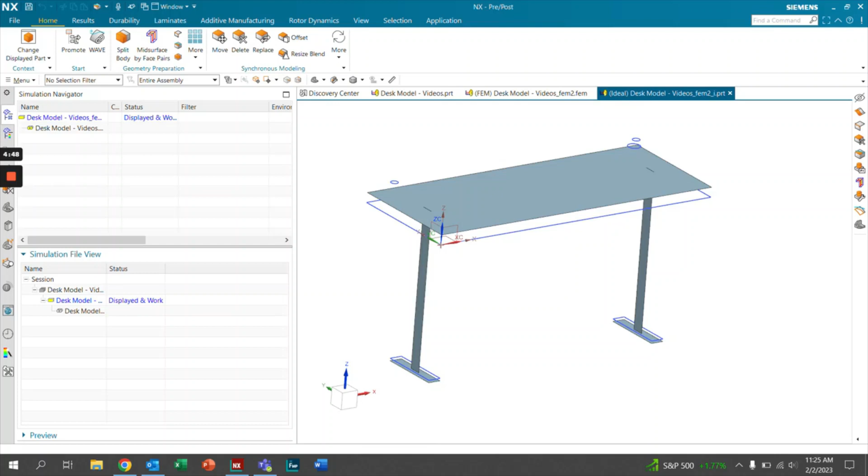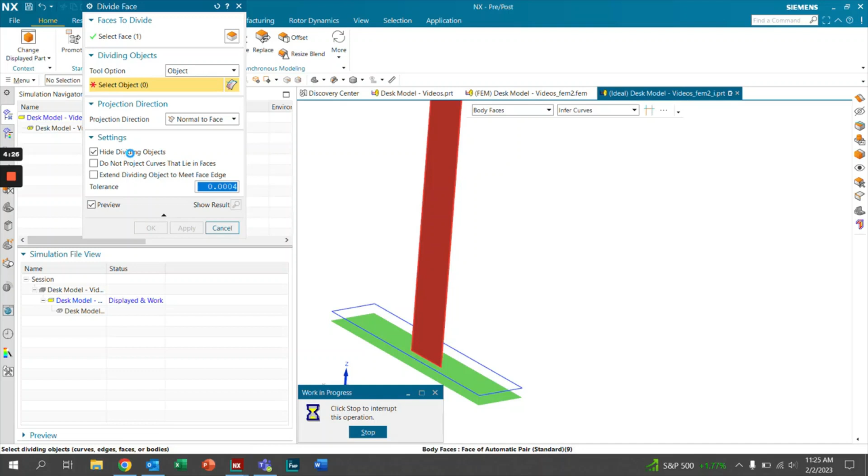The first step into lining up our nodes is to see where our faces and sheets are intersecting. We're going to use this divide face tool to create a line that will help us line up our nodes. So we want to select the face to divide, which is this face, and the face that it's going to divide, which is this face. We don't want to hide the dividing objects, and we want to click this box that says Extend Dividing Object to Meet Face Edge. So we click that and go to Preview, and you see that it creates a line right here, and that's exactly what we're looking for.

So we're going to apply that, and do that everywhere they intersect. We have another intersection right here. This is the face to divide, this is the face doing the dividing. We're going to go ahead and click Apply.

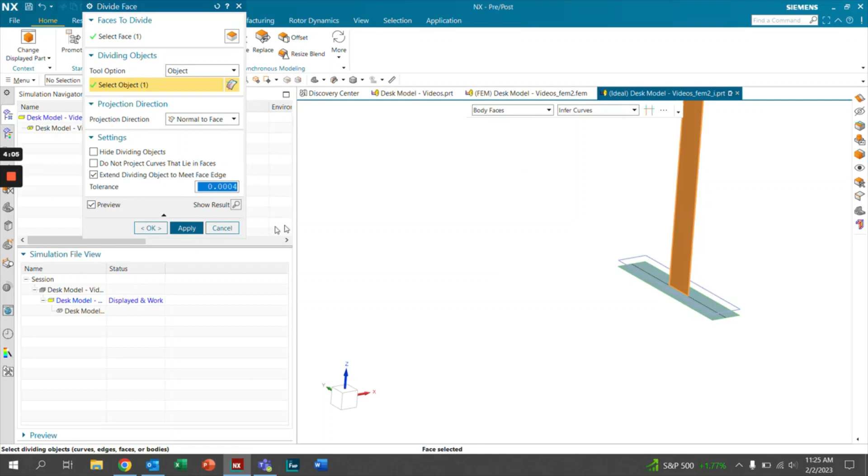Again, we have two more intersections. We're going to flip this down. The face to divide is this big face, and the face that is dividing is this face. We're going to go ahead and click Apply.

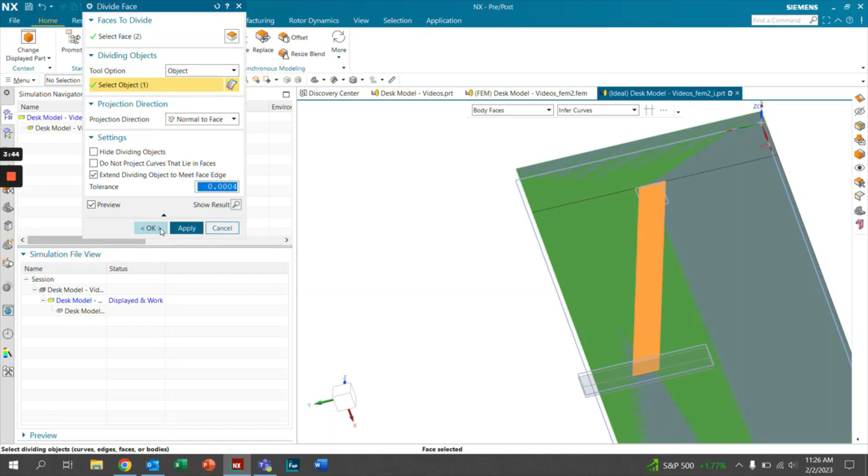We're going to zoom out and do the same for this face. I'm going to click OK. So now we see that all of our faces have been divided.

So now we can actually go into the meshing. We're going to be done with the idealized part, and head back over to our FEM model. We're going to open up the FEM model, and we'll see that we still have some solid bodies showing, so we're going to hide those. We just want to work with strictly the sheets.

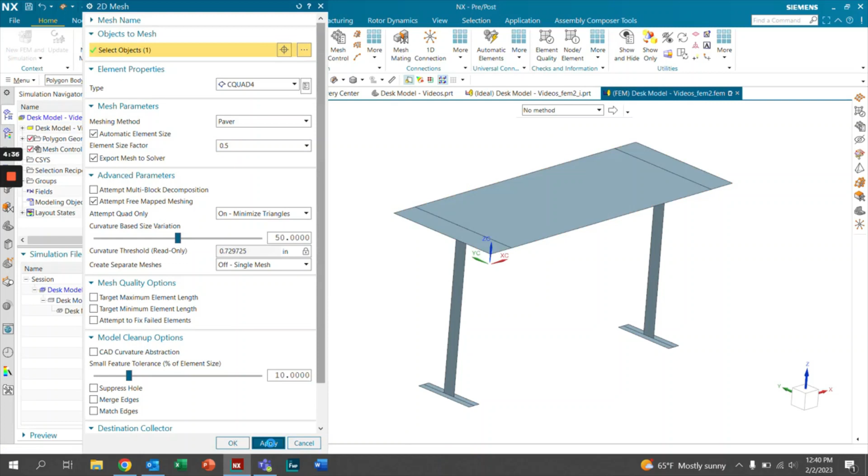From here we can finally apply our mesh to capture our geometry. We're going to click on the 2D mesh, click on automatic element size, and have it at 0.5. We're going to mesh this sheet right here, apply, and go one by one and click all of these sheets and mesh them. Let it load.

Sometimes meshing can take a little while, so we're just going to let it load, and go one by one.

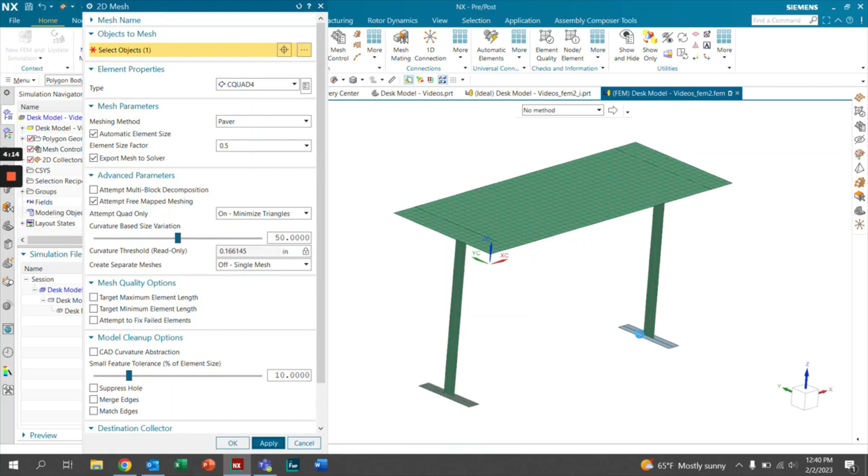Once this is done, we're going to go ahead and add our materials. It's very important that we add our materials, because if we don't, we're going to get errors. So we're going to go to our 2D collector, open up, go to each and every one of them, right click, hit edit, and add materials. For this material, we'll just go ahead and add a basic aluminum 6061.

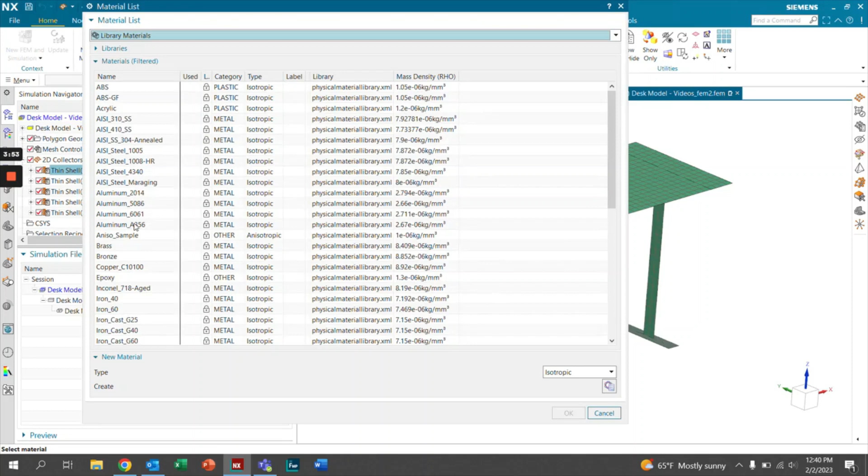Before I go, we're also going to want to add thickness, and the thickness is going to be the same thickness that you modeled it as in the 3D part. So we're going to have this one be 4 inches. We're going to click OK.

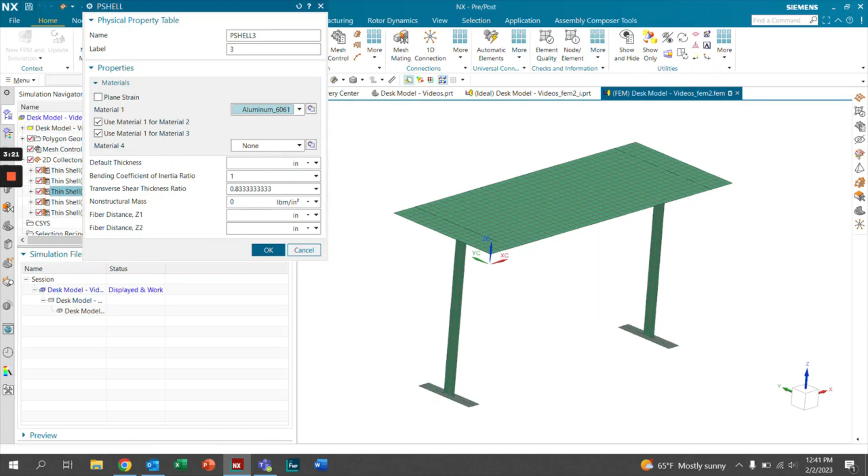You're just going to want to go ahead and do that for all of them. So this one, same process, aluminum 6061. The default thickness is 1 inch for these. Click OK. Edit, same process, aluminum 6061, thickness 1 inch, OK.

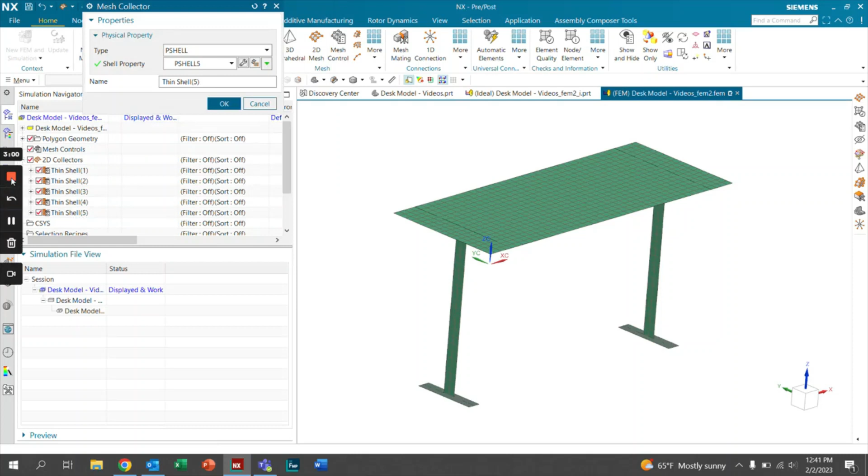So now that our mesh and materials have been applied, we want to make sure our nodes are lined up. We're going to zoom in, turn this to the other side, and see that we have one node right here, one node right here, and one node right here. We're going to go to more, click on duplicate nodes, select both of these bodies, and we're going to see that they are.

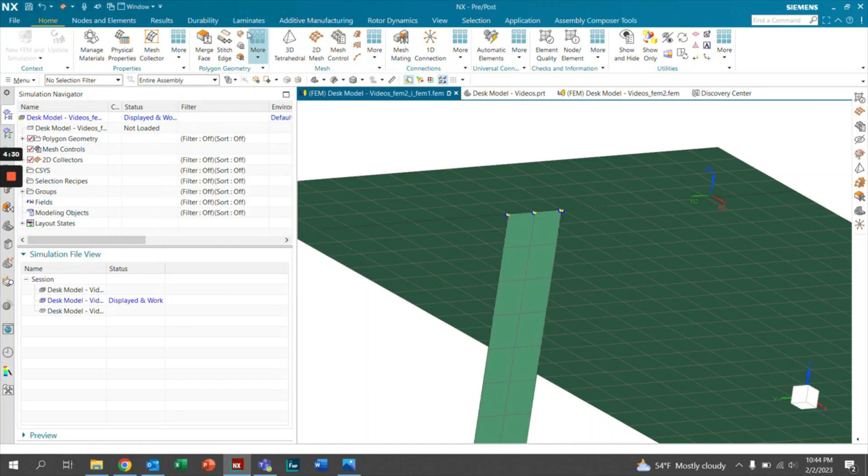However, since we will be applying a mesh control to the bottom surface, we're going to have to apply one right here. So the first thing we want to do is split the face, and when you do this, you want to create a line as straight as possible. We're going to grab this point right here, grab this node right here, and click OK.

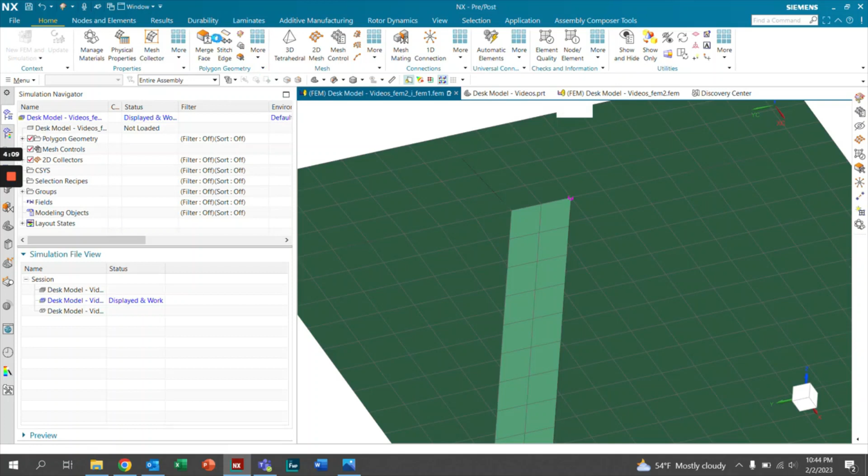As you can see, it creates this straight line right here. Then we're going to update the mesh, and now these faces are split right there. We're going to do this on the other side as well. Always want to grab this far edge first. Split right here, split right here. Click apply, update. Now we see that the mesh changes right here.

We're going to apply a mesh with just 2 elements. Click automatic, click OK. Then we're going to hide this. I want to go ahead and hide this, and apply the mesh to the same edge, but on the other surface. Automatic, click OK, and should be good to go.

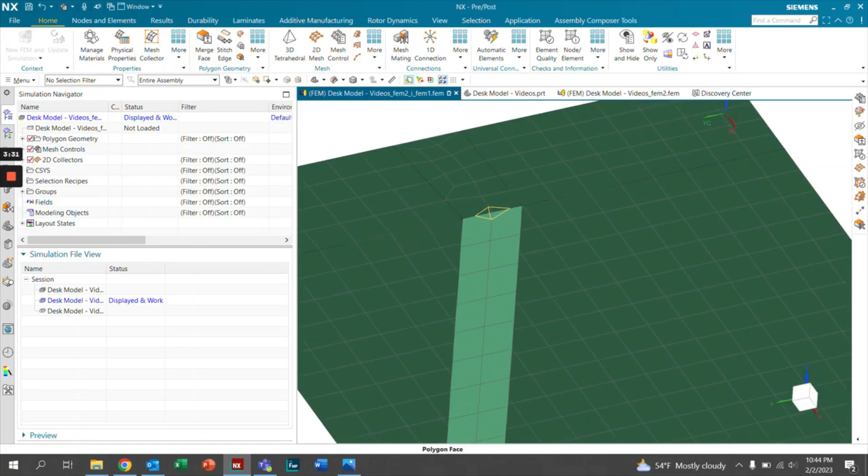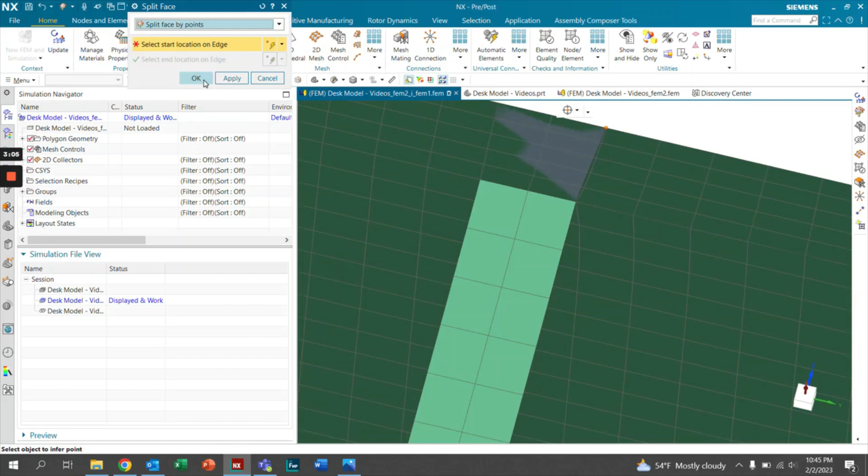Now I'm going to zoom out and do the same thing on this other side. Zoom in, we're going to split the faces. Grab it from this edge right here to this node right here. Click OK, update. Then the same thing one more time: this edge right here, this node right here. Update. Then we're going to apply the mesh control one more time.

Just leave it at 2, automatic, click OK. Then we're going to hide this one as well as this one, and we're going to hide it. Mesh control, grab that same edge, automatic, hit OK.

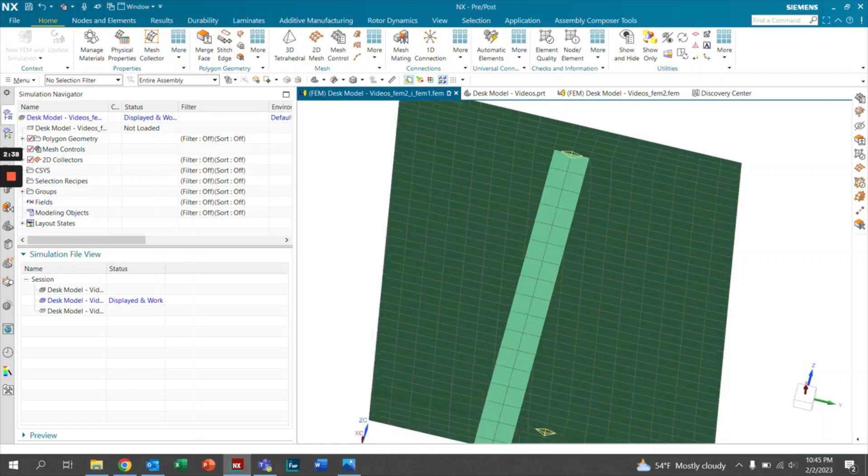Now we're going to do the same for the bottom. We're going to go in here, and we're going to see that they actually don't line up. So this is more reason to do it right here. We're going to split the face from this edge right here to this node right here. Click OK, hit update, and do the same thing one more time, grabbing this node and this node. Hit OK and update again.

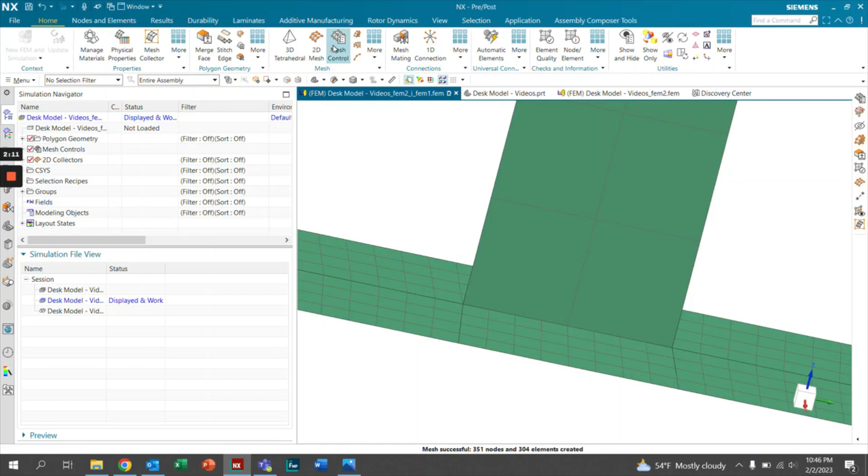So now we notice that we're going to grab this same edge, and this time we want to grab the top one, and increase this to about 6. Hit automatic, and you see that the mesh actually changes to align to the number of nodes you give it. So we're going to add another one right here and one more, and you see the nodes finally line up right here. So we know it's 8. We're going to click OK.

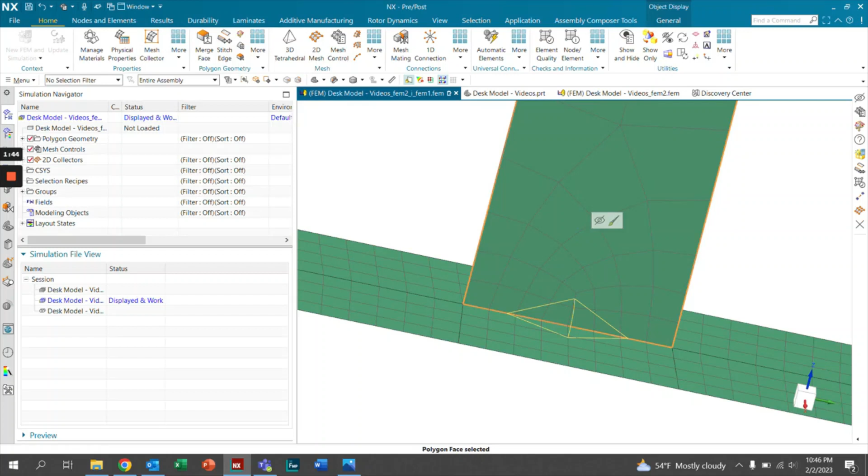We're going to hide this body, apply, and apply that same mesh to the bottom just to make sure that they always line up. Click automatic, we're going to click OK, and it should be good to go.

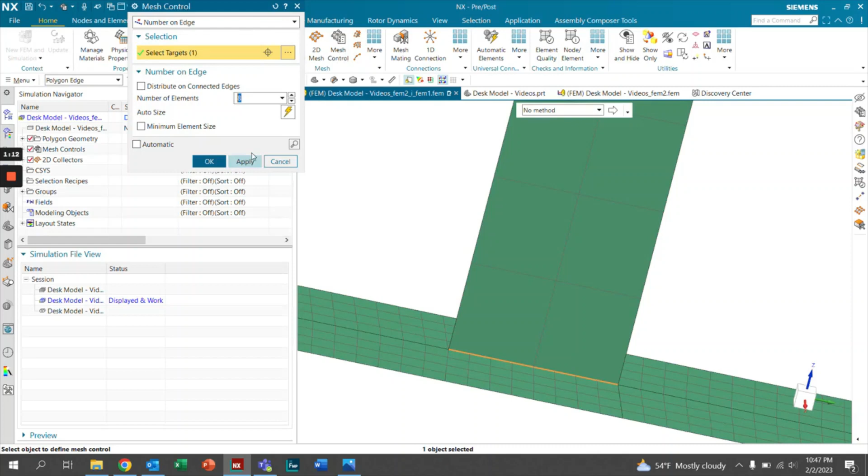So the same thing is going to be done over here. We're going to zoom in, split the face from this node to this node. Click OK, update, and split the face one more time from this node to this node. Click OK, update. We're going to apply the mesh control one more time to this edge right here. We want it 8 again, same as the other one. Hit automatic, it updates automatically.

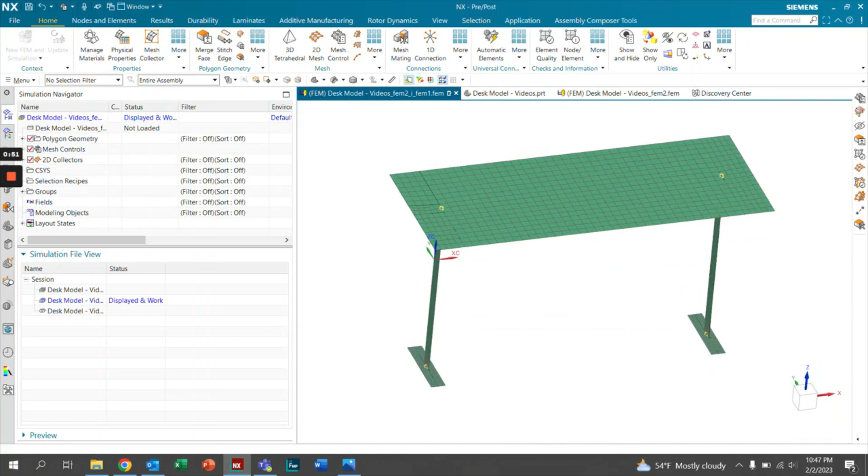So now we're going to hide this right here. Once we hide these sheets, we're going to mesh control the same edge, but for the other part, hit automatic, and you see that they line up once again. In order to make sure they line up all together, we're going to go back to our trusty duplicate nodes, and highlight our whole model, and as you can see, they do line up. If we want a sanity check, we can zoom in more, and you see that they indeed all line up and that there are no free edges.

That's going to do it for us today on the second part of 2D meshing, focusing on the actual meshing.